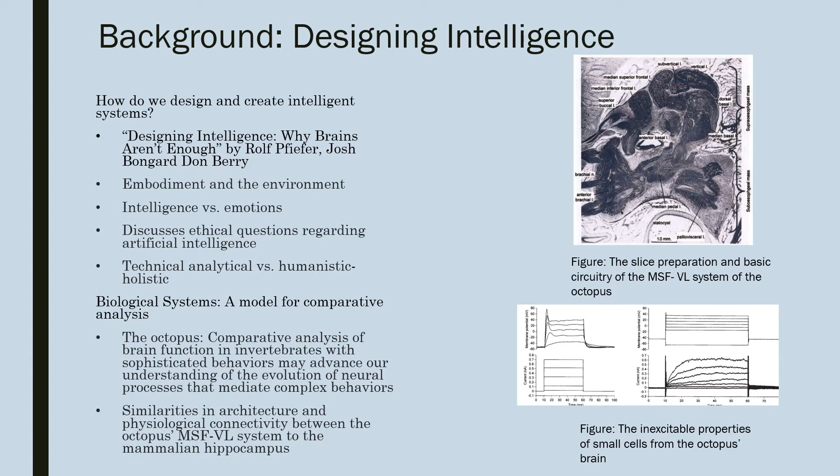As octopuses and vertebrates are very remote phylogenetically, this convergence suggests the importance of the shared properties for the mediation of learning and memory. In particular, the similarity in architecture and physiological connectivity between the octopus's median superior frontal lobe/vertical lobe and the mammalian hippocampus allows for the comparison of features needed to create memory association, crucial to intelligence.

We are taking this information and beginning to apply it to engineering systems such as soft robotics. The design and construction of this new class of machines is organized according to the principles of life regulation and must share some essential traits with all living systems. Instead of hardening or adding raw processing power to achieve resilience, these systems are designed instead by introducing vulnerability with soft tissues embedded with electronics, sensors, and actuators, providing a source of information about the body and environment.

These machines would have the capability of exhibiting feelings, improving their functionality through various environments, and even developing a conscience. Soft robotics has countless applications, and if we better understand how to design intelligent systems with their own capability of learning, so many advances will be made in technology and medicine.

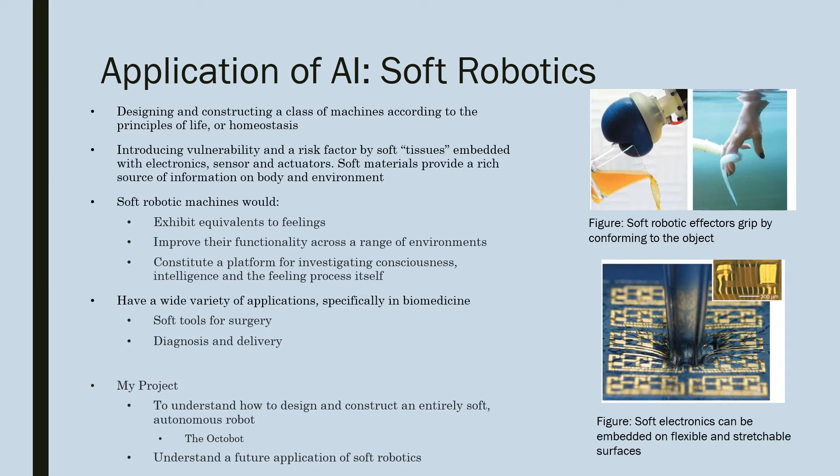For my project specifically, I had to understand how to design and construct an entirely soft, autonomous robot. Because of our focus on the evolution of the octopus, I also focused my design on what we call the Octobot. The Octobot is a completely soft pneumatic robot with 8 arms powered by monopropellant decomposition. Monopropellant decomposition is when fuel rapidly decomposes into gas by being exposed to a catalyst, which powers the system.

The Octobot is controlled by using a microfluidic soft controller created by using a multi-material embedded 3D printing technique. And the overall elastomeric body, which houses everything, is created by a molding technique. As stated before, the Octobot is powered by monopropellant decomposition.

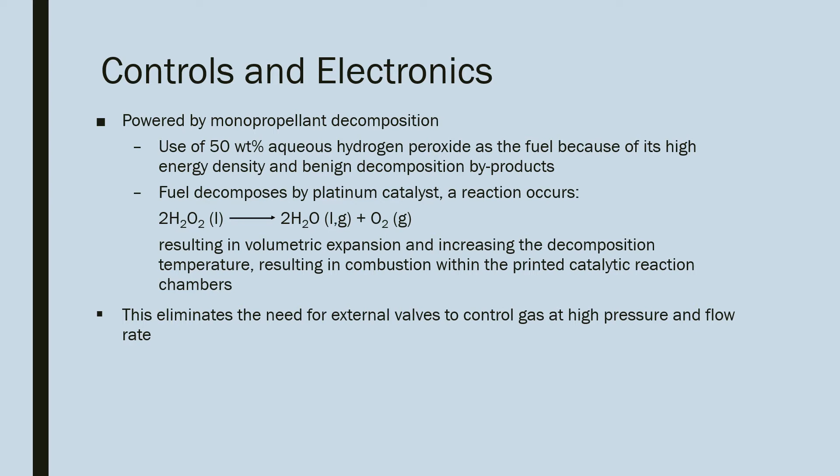Specifically, when a 50% weight solution of aqueous hydrogen peroxide is exposed to a platinum catalyst, a reaction occurs, resulting in volumetric expansion and increasing the decomposition temperature, resulting in combustion. This eliminates the need for external valves to control the gas at high pressures and flow rates.

The Octobot is controlled by an embedded soft controller made up of 4 components: the upstream liquid fuel storage, which uses check valves to maintain fuel flow; the oscillator, which regulates the liquid fuel by a system of pinch and check valves, converting the inflow into alternating fuel outflow.

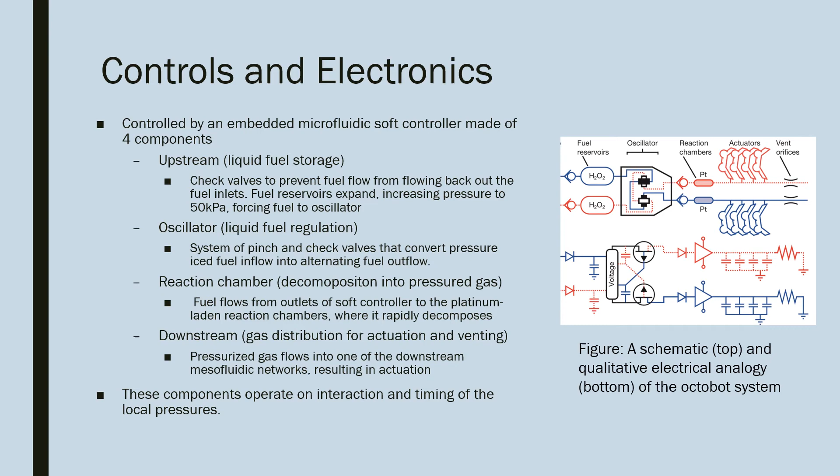The reaction chamber, responsible for the decomposition of the fuel, and the downstream, where gas distribution for actuation and venting occurs. All of these components operate on interaction of time and pressure. A schematic of this control system is shown to the right in the figure.

The control logic of the Octobot works as a function of time. First, the nominal pressure drives fuel through the system at a decreasing rate. Then, the pinch valves in the oscillator convert upstream flow into alternating flow. When the upstream pressure is too low, oscillation is not possible, so both sides flow at a reduced rate.

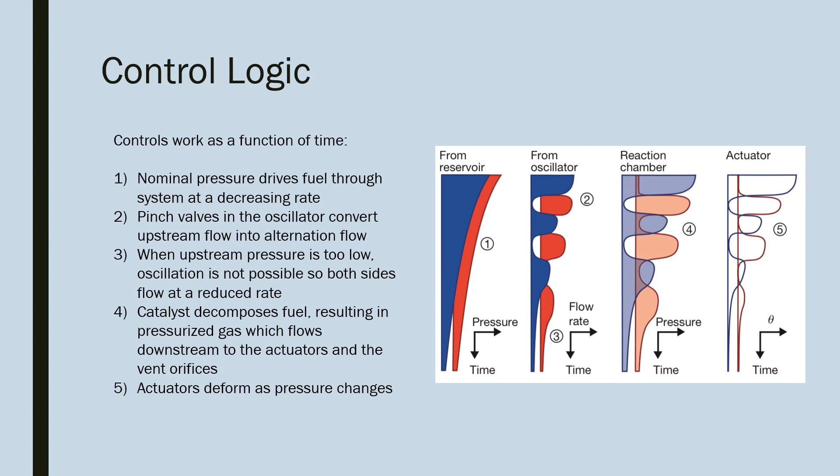Then the catalyst decomposes the fuel, resulting in pressurized gas, which flows downstream to the actuators and the vent orifices. Actuators then deform as the pressure changes. This schematic is shown to the right.

For the fabrication of the Octobot, the following features are needed: body matrix, fuel reservoirs matrix, printed fuel reservoir traces, fugitive plugs in the soft controller, printed platinum reaction chambers, printed pneumatic networks, printed vent orifices, printed actuators, and mounded hyperelastic actuator matrix. The diagram of this schematic is shown to the right.

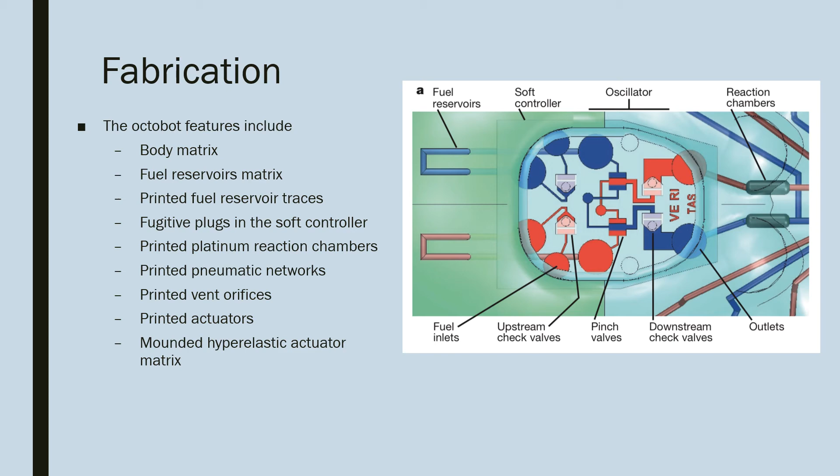To fabricate these features, a multi-material embedded 3D printing technique creates pneumatic networks within a molded elastomeric robot body. First, micromold the soft controller that houses the microfluidic logic necessary for controlling the fuel decomposition. A microfluidic soft controller is prefabricated and loaded into the mold. Matrix materials are then poured into the mold.

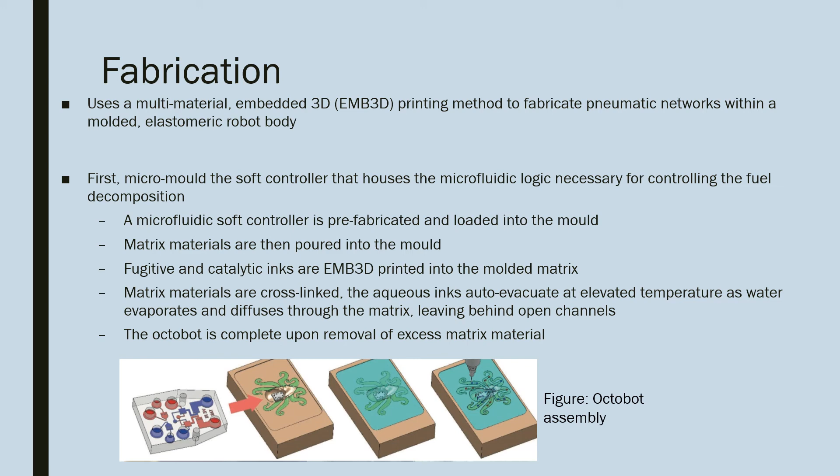Fugitive and catalytic inks are EMB3D printed into the molded matrix. Then, matrix materials are cross-linked. The aqueous inks auto-evacuate at elevated temperatures as water evaporates and diffuses through the matrix, leaving behind open channels. The Octobot is complete upon removal of excess matrix material.

To create the fuel reservoirs, catalytic reaction chambers, actuator networks, and vent orifices, fugitive and catalytic ink are 3D printed within the molded matrix materials. These printed features are interfaced with each other and the soft controller through fugitive plugs placed at the inlets of the controller before filling the mold with matrix materials.

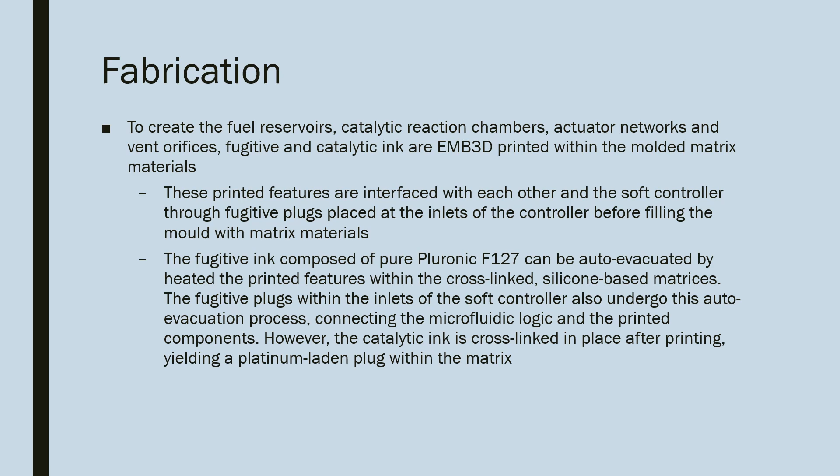The fugitive ink, composed of pure Pluronic F127, can be auto-evacuated by heating the printed features within the cross-linked silicone-based matrices. The fugitive plugs within the inlet of the soft controller also undergo this auto-evacuation process, connecting the microfluidic logic and the printed components. However, the catalytic ink is cross-linked in place after printing, yielding a platinum-laden plug within the matrix. So that was the overall design and steps needed to create the Octobot.

The Octobot is a simple demonstration of the integrated design and fabrication strategy of a fully soft autonomous robot. It serves as the foundation of a new class of soft robots that could provide benefits in manners non-existent before. In the medical field, soft robots have great potential due to their ability to interact with the environment in a vulnerable way. For example, soft robotic intubation.

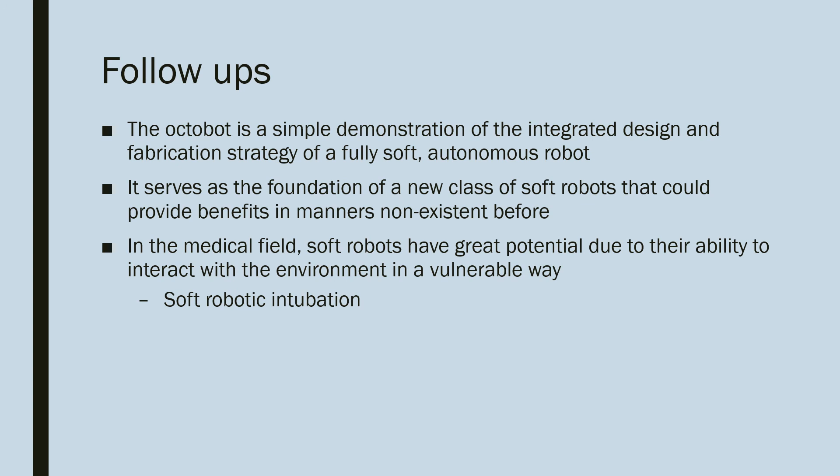Endotracheal intubation is one of the most common procedures performed in emergency departments and operating rooms. It's a complicated procedure that's susceptible to failure. So I propose the creation of a fully soft autonomous robot that automates this procedure. The soft materials will help reduce risk and damage to the human tissue. It will also increase efficiency in the medical field.

Artificial systems and soft robotics are the future of engineering and the future of our world.